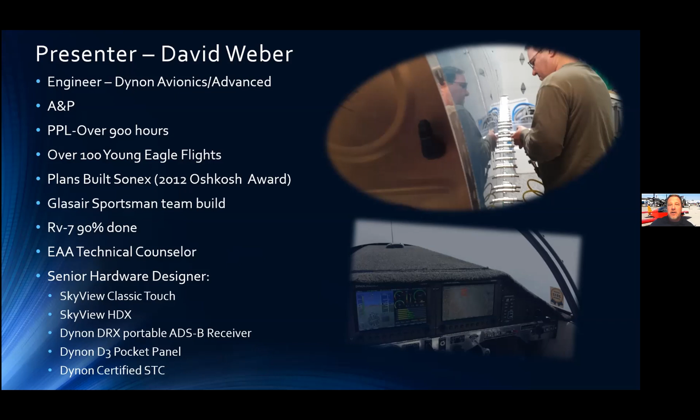I am an EAA technical counselor. I do an inspection on an airplane at least 2 or 3 times a month. I learn a lot doing that, and I hope to educate people that are not quite as involved in aircraft construction as I am. I'm a senior hardware designer for the Skyview Classic Touch and the Skyview HDX. That was probably my biggest project at Dynon. I did all of the industrial design, mechanical design, everything from the bezel to the buttons on that. The Dynon DRX, all the mechanicals on that, the Dynon D3, and I've recently transitioned into the Dynon certified STC side of the company, doing all the design work on the autopilot installations and panel installations for that group.

All right, let's get into this. Planning for success. I'm going to give you an outline of what we're going to talk about today: before you buy, system components, installation fundamentals. We're going to talk about panels, ADAHRS, remote compass, an EMS module, GPS receiver, and then a little thing I call hold my beer and watch this. It's basically some things you should do before you take that first flight.

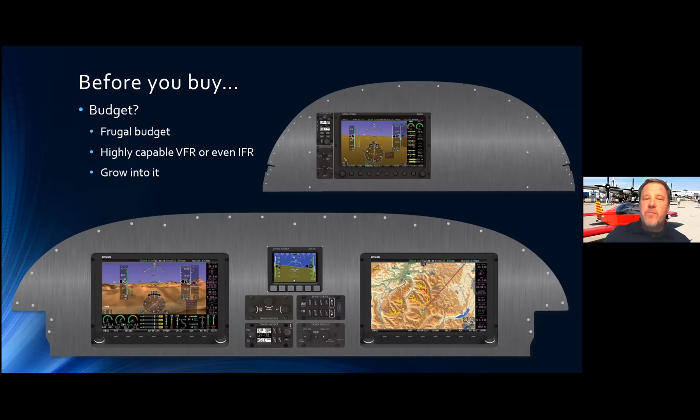You know, you leave that catalog sitting on the coffee table during Christmas time and circle that next component you need and just kind of shove it out there to your wife and let her know what you're looking at. It's worked for me a couple times. You should try it. So we're going to grow into that.

Before you buy, you also want to do some product research and some system planning. Keep in mind, you're not just buying the product, you're also buying a company.

A lot of people say, and my dad was absolutely wonderful at this, he would buy the cheapest thing he could possibly get, but what he didn't realize was that a lot of times that didn't come with things you would get, like technical support. Does that technical support cost you money? There's kind of a history in our industry that a lot of companies will charge you for technical support.

Dynon has never, Dynon will never charge you for technical support. One of the things Dynon is very proud of is that when you call us, we pick up the phone. We have guys that monitor the forum. Mike has answered plenty of questions on weekends and holidays on the forum. So Dynon is very active in providing the technical support you need.

How long has a company been doing business in the market? This is something else. Dynon's market is the experimental aircraft. It's our bread and butter, it's what we started doing years ago. We've never left that, we have no plans to leave that. Everything that we do, experimental is the first thing in the thought process that we go through. The vast majority of our resources are spent towards the experimental market.

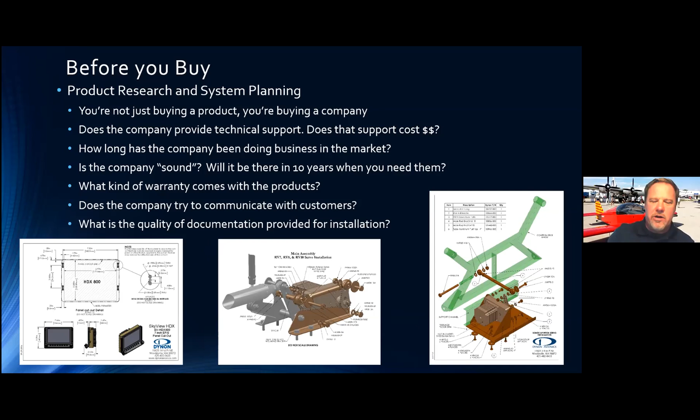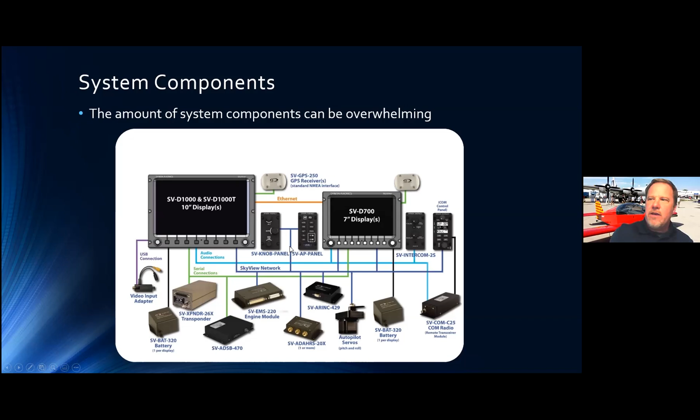And it continues to grow when you add things like fuel flow sensors, engine oil temperature sensors, amp shunts for current flow, pitot, AOA, and pressure sensors along with manifold pressure sensors. The system starts to grow and grow and grow.

But I don't want to scare you away with that, because glass systems can require more components because they do more, but they're also more expandable and flexible. As you allow a system like basically a computer into your cockpit, you notice that it has that flexibility where you can keep it simple or expand it as you grow. And you'll hear me over and over again talk about the expandability of a glass cockpit and the system that goes along with that. If desired, they can be very simple.

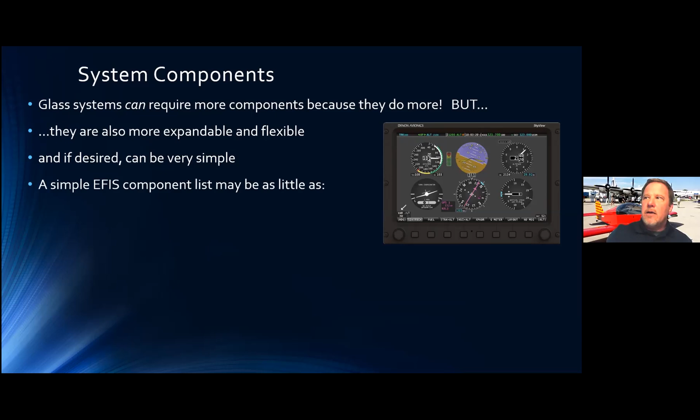And what do I mean by simple? Well, a simple EFIS can be as little as a display panel, an ADAHRS, an OAT sensor, and a GPS receiver. That is all you need for your basic six-pack using a SkyView system. So it can be very simple along those lines, as you can see with this.

I'll add just one quick thing to what David said about the components. Sure. He showed you a kind of a logical interconnect diagram there that showed things that are connected via SkyView network and things that are connected to other systems or via serial connections.

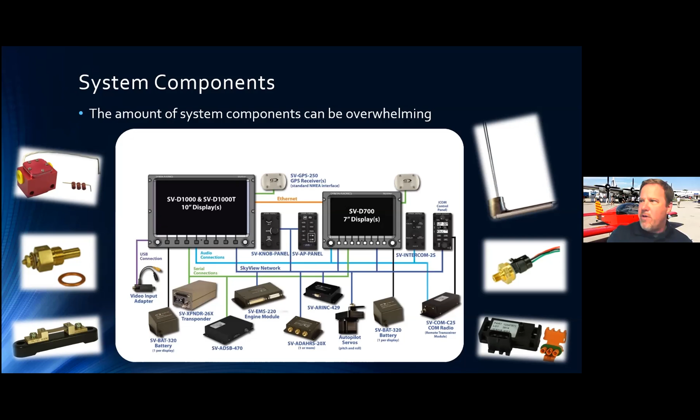We now have harnesses to cover almost all of those interconnects, and things like all of the dark blue, the SkyView network, it's literally just plug and play. And other harnesses have color-coded wires that match the diagrams in our manuals. So we've made it as easy as possible there. Great, yeah, great point, Mike. We've worked really hard at getting the system as simple to install as possible.

So we've got a highly capable EFIS system, and it can be simple, but you can also start adding complexity to that. But we like to call it highly capable, because we've taken that complexity and made it as simple to install as possible. I also want to point out here some of the different components that you can start adding and expand in that system.

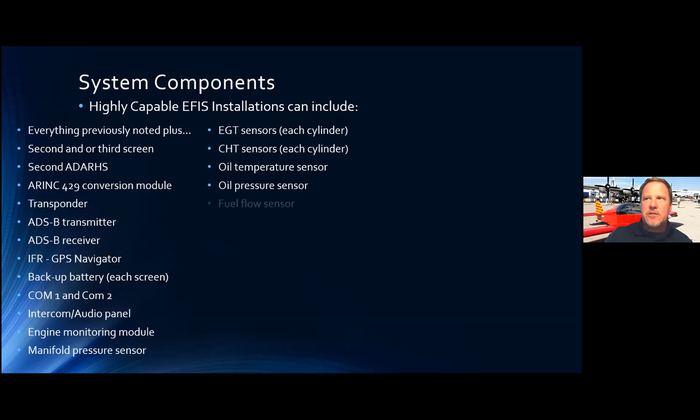Second ADAHRS, transponder, ADS-B transmitter, ADS-B receiver, an IFR GPS navigator, backup batteries for each screen, COM1, COM2, an intercom, engine monitor module, manifold pressure, all these things that keep going on. I don't have a complete list here, and yet you can see how overwhelming all these different components and features that can be added to a glass panel system can be.

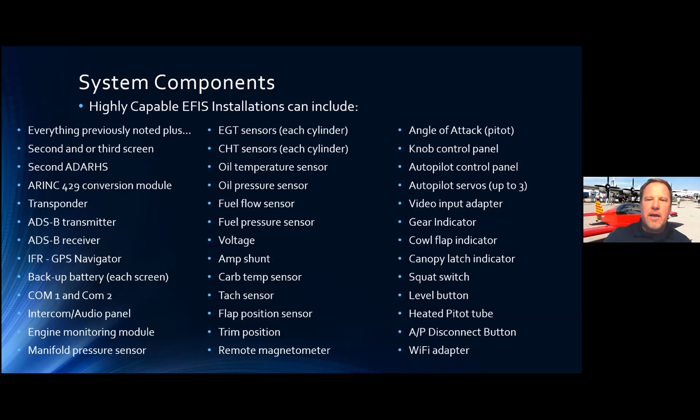And I put this up here to, again, show you the expandability of your system. You can start off basic and just keep expanding as time goes on. Okay, before we move on, any questions so far?

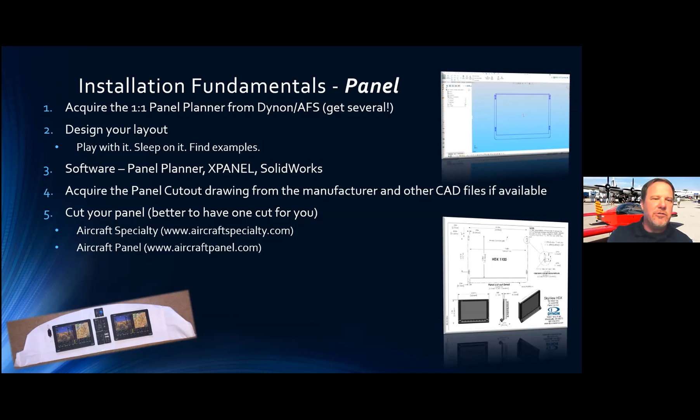Acquire the panel cutout drawing from the manufacturers. Again, I'm highlighting a spec sheet here that we provide, all downloadable off of our website. You can cut your own panel, or better yet, you can have somebody cut it for you. There's a couple companies right here that I point out: Aircraft Specialty that will cut panels, Aircraft Panel that will cut panels, and they are very familiar with our stuff. They know how to cut out our equipment and how to mount the anchor nuts, etc., to get you a great and very successful panel.

Now, of course, there's always the ultimate option here, which is to go to Advanced Panel. Advanced is a sister company of Dynon, and we're very proud of what they're able to do. And I'll give you an example here in a second of what they're capable of doing. But this is one of those things where you are very scared, for lack of a better word, of wiring your own panel.

I always joke with the president of the company, Robert. I said the scariest part for a builder isn't the first flight. The scariest part for a builder is turning on the panel for the first time and praying you don't see that magic smoke come out. Magic smoke is very expensive, and I'm sure that there's a few people in the crowd that have experienced that.

Given that inability, go ahead and talk to Advanced Flight. They'll give you a quote for free. They're very friendly, and they've done this time and time again. They know what they're doing.

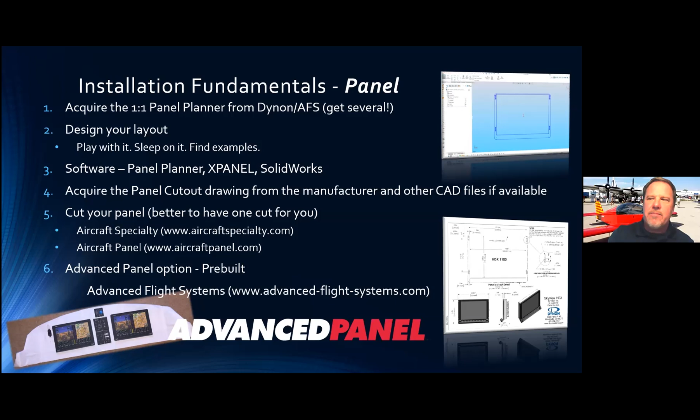And then you get yourself a nice, beautiful panel sent to you like this from Advanced Flight. Absolutely gorgeous layout, very well laid out and very well thought out.

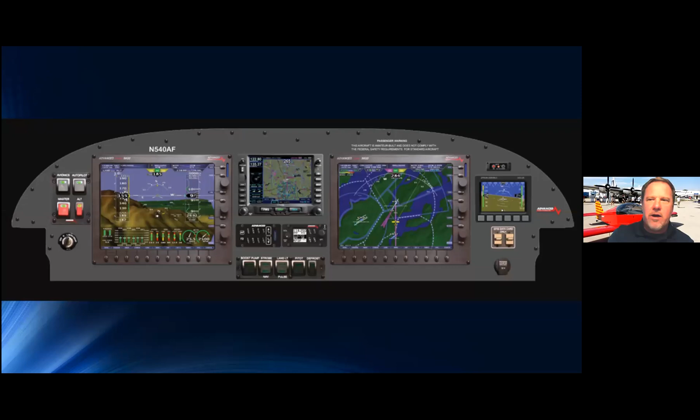Great. One of the things I try and educate people on is panel layout. And I see it time and time again where not a lot of thought goes into where the components should be placed, and you kind of get this busy panel. The FAA has gone out and created an advisory circular, 23.1311-1C. And basically what this does is it goes through in detail, think government document, how to lay out a panel. They talk about field of view for the pilot, and it's all based off of an average panel distance to the pilot's eye. They deem that to be around 30 inches.

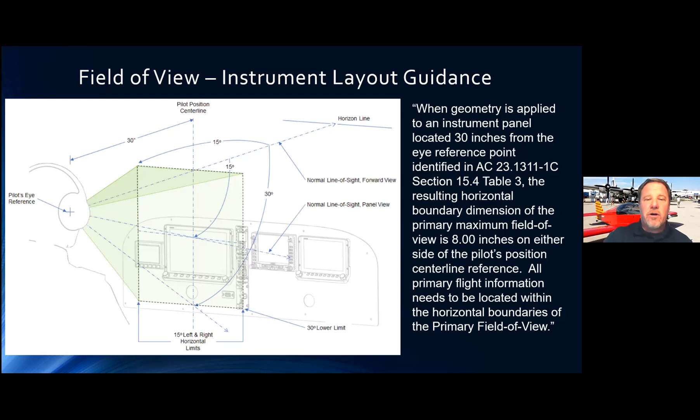And at 30 inches, you want this 15 degrees of sweep from the left to the right, 30 degrees from the top to the bottom. And it really translates into about 8 inches either side of the direct center line of the field of view. That is the optimal area. For primary equipment, primary instruments, you should not have to turn your head and still have everything in viewable sight. This isn't a requirement for experimental, but it is a requirement for certified aircraft.

Hey, David, one question we get in the sales office pretty often, more so for the certified side of the house, is placement requirements for the D10A. You want to talk on that for just a second? Sure, the D10A is considered a backup instrument, and again, it's not required in experimental. Originally, the D10A was laid out over on this side panel, and that was not acceptable to the FAA, so we came up with this location.

The D10A has a very small screen compared to the other screens that we have, so we try and keep that as close to the pilot as possible. It is a backup, so not as critical, but you definitely want to have that viewable by the pilot without having to do any side-to-side movement of the pilot in the cockpit. A slight turn of the head is not bad, but again, eye movement is what the FAA finds critical in that.

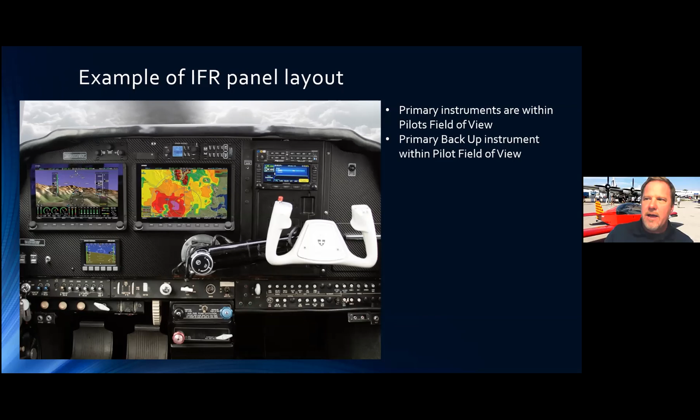You have a harness that, even though it might be 2 inches long for the housing, the harness itself comes out and has to make a radius turn. So it's very critical that you take that into consideration where you're laying components out, even behind the panel on your sub panel.

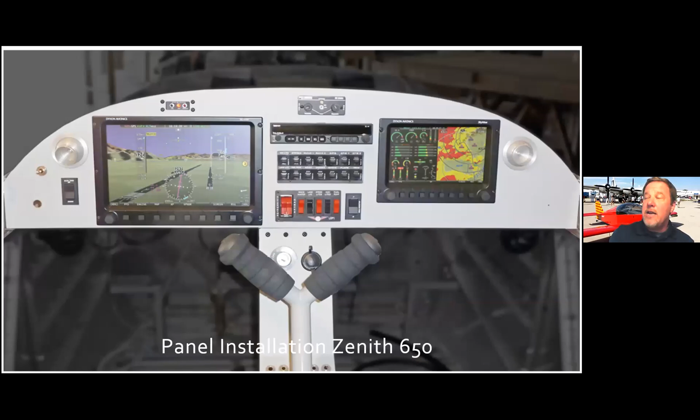Here's an example of a Sonex panel. How do I know that? Well, this was my Sonex that I built. People say that you can't get 2 screens in a Sonex panel. I did it, 2 7-inch screens, not the 10-inch. Don't ever tell anybody I said you could put 2 10-inch screens in a Sonex panel.

Again, everything in the panel is thought out as far as accessibility to the pilot. Everything that is most critical to the pilot, like the radio, is very accessible to the pilot.

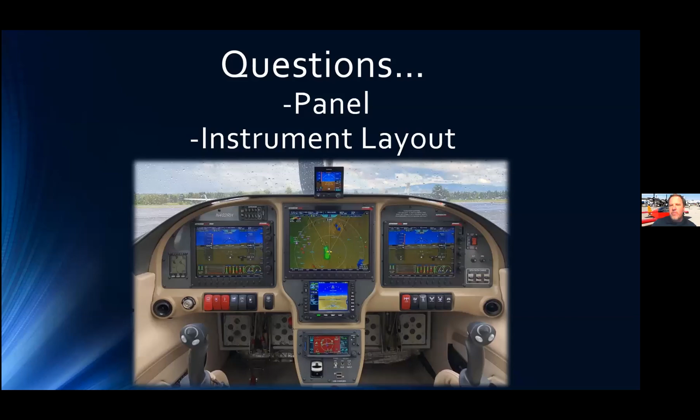Good question. And the answer to that is when the yoke is in flight, it is pulled back significantly from that location, which allows very good viewability of that D10A. I'll back up here a little bit to kind of show you that. If you imagine this yoke swung over here and pulled back about 10 inches, the pilot eye is up well above this, and it gives you a view of the screen on the D10A.

We had to move this up as high as we could without the kicked out bezel of the HDX obstructing it. But you can move it up as high as you can to get that viewability. You also don't want to obstruct the switches down below on the lower bezel. Did I answer your question?

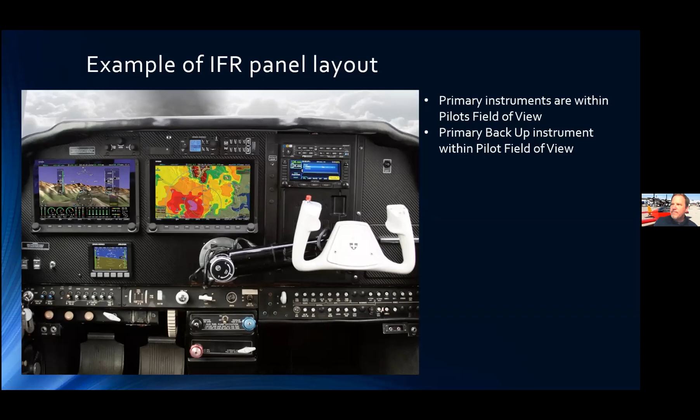Yes, thank you. And of course, in a certified installation, it's always a good idea to make sure you're complying with things like advisory circulars, because although that's not law, it's basically policy and represents the FAA's opinion collectively on things. And as David was saying, the main thing you're trying to do is you want to have visibility.

As a pilot, you don't want to have it way over on the right. You don't want to be craning your neck when, let's say, everything else has failed and you're on one backup instrument, and it's still super capable, but you want to have that thing as near front and center as possible.

One resource we've put together too is our certified panel photo gallery, where you can see the D10A in a number of different locations, sometimes below, sometimes to the left, sometimes to the right, sometimes up high. There are different schools of thought on what the ideal placement is, but you have options.

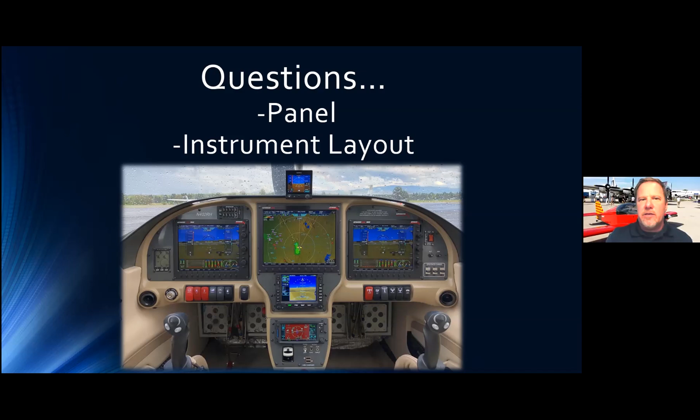So now we're going to start getting into some of the meat of the stuff. We've talked about some of the pretty things, but now we're going to start talking about actual equipment. And the first thing we're going to talk about is what I call the most critical piece of equipment in our avionics system, which is the ADAHRS. This is really the brains of the entire system. If you get this wrong, you're going to be very sorry. You're going to have a system that performs poorly. So we've tried to make that as simple and as flexible to install as possible, and I'll get into that during this part of the presentation.

Some of the things you want to be very aware of when you're doing this installation is you want to make sure that you install it on a rigid surface. Vibration in this is very undesirable. We have an algorithm that can detect what we have determined to be known vibrations of a typical aircraft, and we filter those out. But what I've actually seen people do is put this piece of equipment on top of rubber isolators, and they see poor performance. The reason is because we're expecting certain vibration, but you want it to be rigid. You don't want it on top of something rubberized. For hardware, do not put rubber washers on it. Make sure it's rigid and is not swinging around in large isolation.

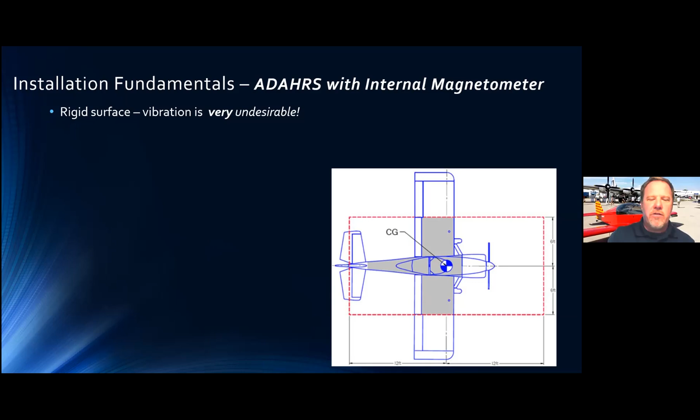Think of a waveform, and the larger the amplitude, the harder it is for us to detect what your aircraft is doing. Small amplitude, which is what you typically see in an airplane, we can filter out and move on. As close to the center of gravity as practical, we give you this nice little chart that shows the box you've got, which is 12 feet longitudinally and 6 feet laterally. Anything outside of that box, you're going to start seeing significant performance degradation in your system.

No closer than 24 inches to ferrous metal. Now, this does not apply if you're using a remote magnetometer, and I'll get into the remote magnetometer mounting in just a bit. There's two types of ferrous materials that we talk about in our system installation: static and dynamic. Static ferrous materials can somewhat be tolerated. What I mean by that is a bar, a piece of steel, a ferrous material that does not move.

Something like a bolt, that kind of thing can be calibrated out when you do your magnetic compass calibration. But if it's moving, it's very difficult. Imagine a steel push rod or a seatbelt buckle.

I had a fellow Sonex builder who put his ADAHRS right behind the baggage compartment, and it was working fine. Then one day he went flying and couldn't figure out why he was having such bad performance on his autopilot. When I talked to him, he had put his laptop in his baggage compartment, about 4 inches away from his ADAHRS underneath the baggage compartment. That laptop completely messed up the magnetic compass and affected the performance of his autopilot. So be aware of that—it's not only static ferrous metals, it's dynamic interference too.

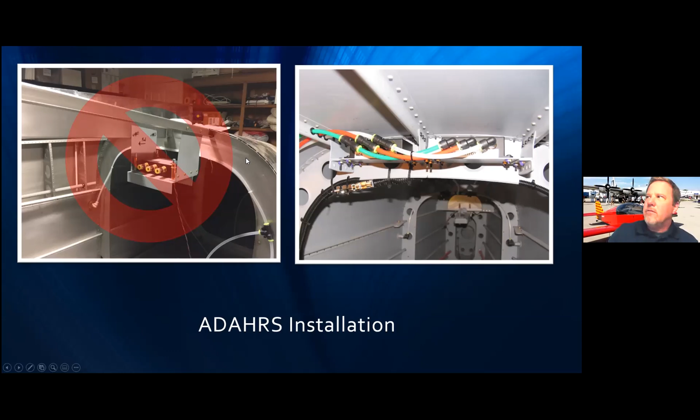What we want to see in an ADAHRS installation is something much more along the lines of what we have here, where we've got nice thick pieces of aluminum. We've got 3 of them coming down, nice and rigid. He's kept the arm of this aluminum piece nice and short so we don't get a lot of vibration back and forth. This is a dual ADAHRS installation, and it's a very nicely done installation—that's what we want to see.

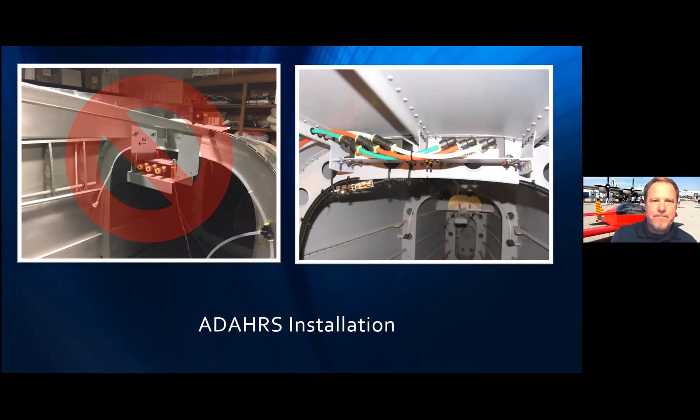Okay, remote compass. Dynon came out with a remote compass several years ago to really take care of you tube-and-fabric kind of guys that were seeing problems. It's the same enclosure as we use for the ADAHRS, but we put a pigtail on it—a pigtail being a length of wire. We do that to keep the connector away from the module.

So as with your ADAHRS mount, keep away from ferrous materials—again, if it moves, stay even further away from it. If it's static, we can somewhat calibrate that out, but still stay away if you can. It doesn't have a specific location, so you don't have to follow within that box like the ADAHRS does. We see these installed way out in wingtips; there are no accelerometers in it, so it doesn't matter if one wing moves at a different speed than the other. It doesn't matter what location you put it in on the aircraft, but again, stay away from ferrous materials.

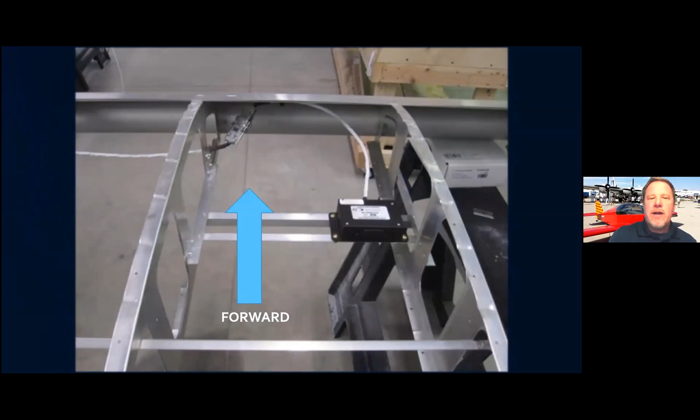There is an orientation requirement though—typically the pigtail has got to be facing the direction of flight, and the pigtail should be at its extended length. That, as I touched on, is to get the connector away from the magnetometer inside the box. Here's a great example of a nice installation: the builder has put it on a nice rigid mount, and he's got the full extension of that pigtail going out, keeping that connector away from the box.

Okay, any questions on the ADAHRS or magnetometer installation? I'll add just one thing on electronic devices and the magnetic sensors, whether you're using the ADAHRS or the magnetometer.

Current carrying wires and devices generate electromagnetic fields. The more the power, the more the current, the higher that field. So for things like wires running to our GPS receiver antenna, they're very low current, very low power, and those wires aren't going to dramatically affect the magnetic sensing performance. Now, on the other hand, the power carrying cables going to your autopilot servos...

The servos themselves carry amps, a few amps to each of those servos, and the wires going to those are also dynamic—sometimes they're on, sometimes they're off. So that would be an example of a thing to stay feet away from. You have almost up to 5 amps going through those wires, so exactly, stay from those kind of wires.

Any other questions on the topics we just covered? Otherwise, I don't see any hands, so I think we're good to move on.

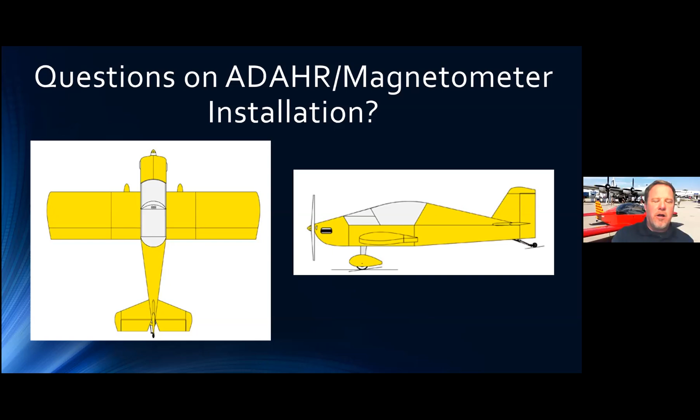Next thing we're going to talk about is the EMS module, the engine monitoring module.

Again, severe vibration does things to electronics that aren't good. So just try and keep things away from high vibration areas. Make it a nice rigid mount. Don't put it on a piece of sheet metal that's going to bounce back and forth. I'll give you some examples here towards the end of this section.

Avoid excessive heat, high temperatures. The reason for that is multiple things, but high heat can cause electronic components to drift, and it can give you inaccurate readings. You have something very hot, you've got sensors inside that box, they're going to drift slightly and give you different readings. It also can reduce the lifespan of electronic components.

I have seen people mount EMS modules on the hot side of the firewall. Not recommended. They tell me, oh, it works just fine. I understand it works, but you're reducing the lifespan of that piece of equipment. Having an EMS module fail while you're in flight over the Rockies is not something that you want to encounter. So do yourself a favor, keep it on the cold side, keep the vibration low to it.

And again, with almost every bit of electronics, keep it away from EMI—spark plug wires, wires with high current, magnetos. The further away from high energy EMI, the better off you're going to be.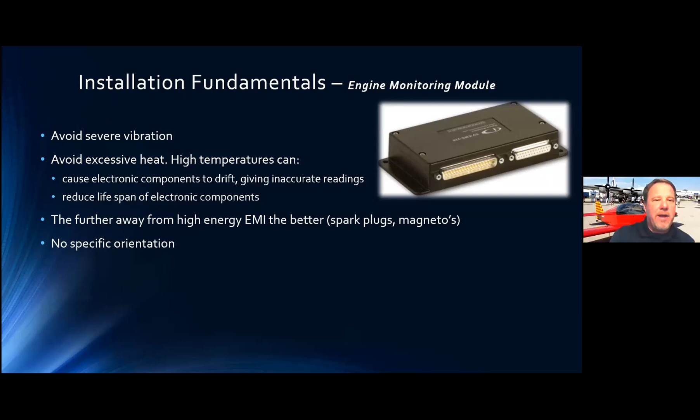This has no specific orientation. You can mount it underneath a seat, mount it underneath the panel, right side up, upside down, whatever you want to do. No specific orientation whatsoever.

I touch on this because we get this quite a bit when it comes to the thermocouples, and that is, can I cut the wire? Yes, you can cut the wire, but I suggest if you do cut the wire, make sure you're cutting the right end of the wire. I have had people cut the wrong end of the wire, so make sure you're not cutting the thermocouple end off. But I also suggest that you keep the wire lengths as reasonably as possible the same length.

The reason for that is possible future troubleshooting. Sometime in the future, you might have a cold cylinder and want to swap a thermocouple around to see if it's the thermocouple or the cylinder. This gives you that ability without having to add a completely different thermocouple. So if you can keep those lengths the same, the better off you're going to be.

If you do need to extend the length of that wire, I strongly suggest you contact Dynon. We have worked with people in the past to provide them either extra length in that harness or some sort of extension. We do ask that if you have a junction on that wire, you well insulate it and keep it away from any sort of heat source. You will get drift if that happens.

As I said, I can't preach this enough: do not install it on the hot side of the firewall. People tell me all the time, 'I did it and it works great.' Don't do it. You're going to regret it at the worst time in your flight.

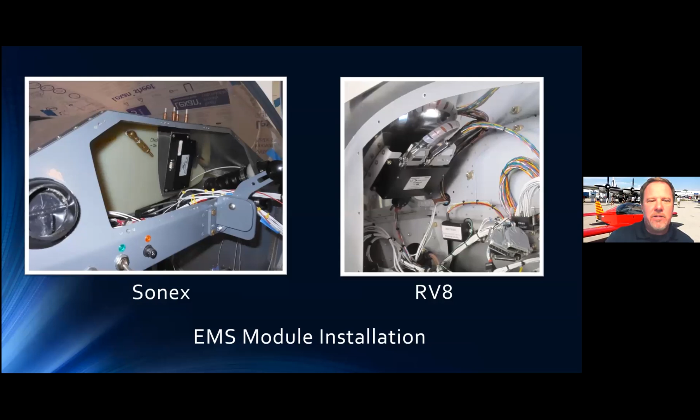Here's a couple other examples. I believe this is a Sonex where the installer has put it right here — again, a nice, easy path through the firewall out into the engine bay area. No fire sleeve here, but that's just my tech counselor talking.

Over here on this side, we've got a module mounted in an RV8 right next to the ACM module. Not a bad location, but he now has to run wires through this bulkhead and another bulkhead back here to get to the firewall. I would strongly suggest moving this forward and getting it closer to the engine firewall. Much easier to run this cable to the ACM module than to run all this stuff to the back firewall or the forward firewall. Not bad, just not a great installation. Keep that in mind when you're doing yours.

Okay, any questions on the EMS module?

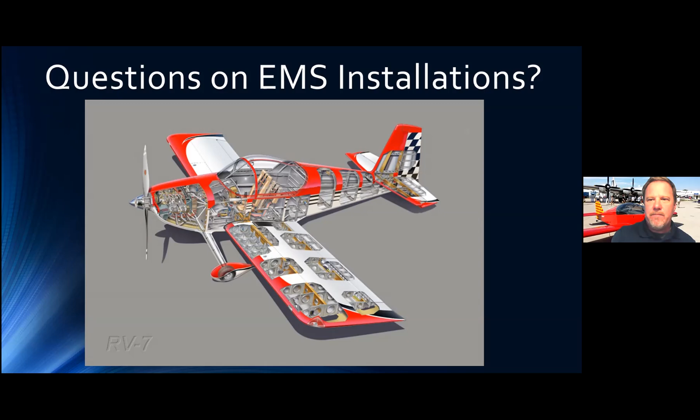We're hitting pretty good on time so far, Mike, so I'm going to keep going forward unless we hear something else. Kyle, did you get any questions? We're good, I don't — so far everybody we've been able to handle in chat. I think Scott got his question answered as well, so keep going, and we'll let you know if something comes up.

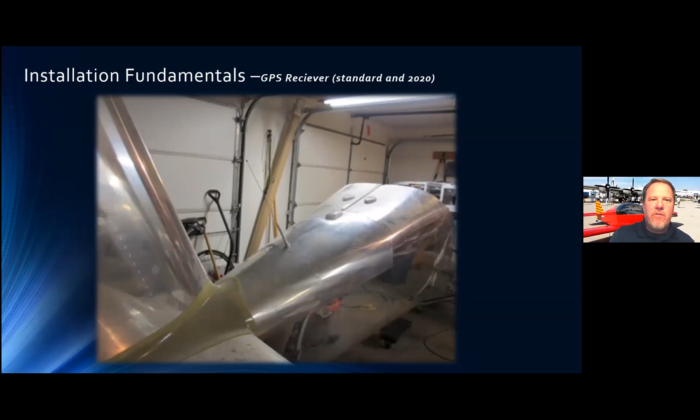Okay, another installation fundamental: the GPS receiver. This is probably the second most controversial installation we get, the GPS module receiver. I have horror stories of people actually putting this on the bottom of the aircraft. Please do not put it on the bottom of the aircraft.

Again, a rigid surface — in fact, I would recommend a doubler on this, even though it's a small piece of equipment. Definitely put a doubler on the backside, because most people mount it like you see here in the picture on the turtle deck on top of the skin. You definitely want to double up that skin at that location.

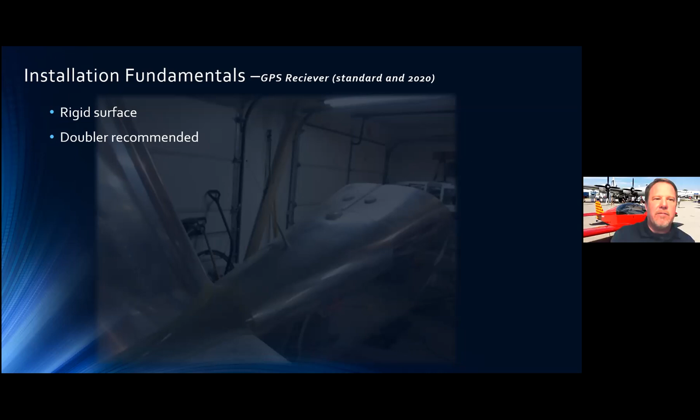36 inches from any transmitting antenna — not such a big deal with an ELT antenna though. Why? Well, if your ELT antenna is transmitting, you've got other problems; you don't really need to know your GPS position. So kind of a gimme on that one. If you want to put it fairly close to your ELT antenna, you could probably get away with that.

Orientation: skyward. Again, I've had absolute horror stories where people tell me they mounted it on the bottom side. I actually had an amphibian aircraft that I went out and did an inspection on, and he had put it on the bottom side of the wing.

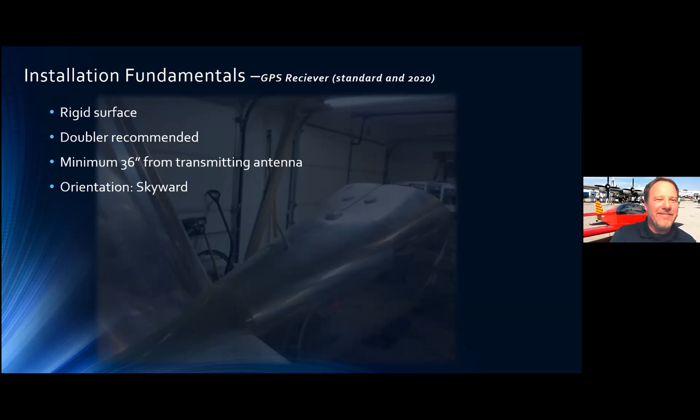He thought it was all right because it was above his head, but not where you want to see it. It's got to be pointing skyward. Mike, a question that you've been posed, if you're going to touch on this anyway, but that comes up often, is where are places people can hide it? What kind of cowl materials can they put it under, or should they avoid?

Yeah, so any kind of metal, even carbon, is not a good place to put over the top of this. You can get away with it with fiberglass, with the exception that most people paint fiberglass, and if you paint it with a metallic-based type of paint, then you're going to really degrade the performance of that GPS receiver. So the best thing, it's designed to be outside. You can put it outside.

If you do have a glass or plastic airplane, as they call them, you could probably get away with it underneath the fiberglass. Again, I would just caution you on what kind of paint you put over the top of it. We do say in our installation manual that you should not paint this at all. We have a very robust paint on top of this module that comes from the factory. It is not a metallic paint, so we know that it is not affecting the performance of that GPS receiver.

You want a 360-degree unobstructed view to the horizon with this. I'm going to give you some examples here in a minute of some bad things that I see people do with installation. But just imagine yourself sitting on top of that GPS receiver; you should be able to turn yourself around 360 degrees and see the horizon without any significant obstruction. Now, obviously, a vertical stab is an obstruction, but it's such a small obstruction in that vertical position, you're not going to see any degradation of performance with that. Not something to be concerned about.

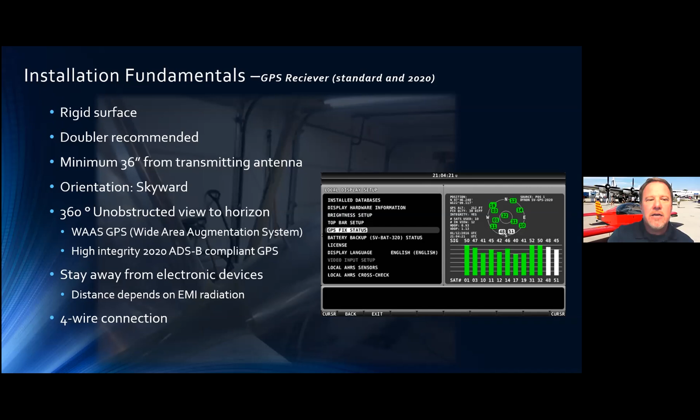The nice thing about our receiver is it's a simple 4-wire connection. It's not a BNC connector like you see on a lot of other receivers. I say receiver, what I really should say is antennas, because they are nothing but an antenna. Ours is, again, a complete system within itself. Therefore, it's a 4-wire connection.

One of the things that you will end up doing with the 2020 ADS-B test is what they call the PAPR test. You go up and fly a certain pattern, a figure 8, and you'll get a report back from the FAA. And even though you get a report back that says you pass with your GPS, with your ADS-B compliant system, the one thing I will tell you is that an installation that might pass the PAPR might not pass the "I'm flying down a valley trying to scud run" test, and all of a sudden I lose my GPS performance. So keep that in mind when you're doing an installation.

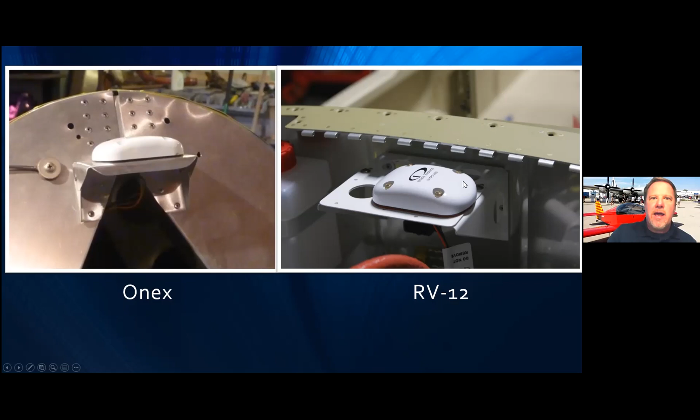We also see this common on RV-12 installations. Why? Well, Vans actually had this as an installation. They have since moved things around a bit, and because the fiberglass cowling goes right over the top of this, you see this kind of installation all the time. I highly recommend against it; this is not a good installation. Do something different. Is it really worth losing your GPS location so that you don't have an antenna sticking on the outside of your airplane? Please don't do this installation.

I beg of you. This is the kind of installation where you're flying down a valley, you're scud running, and all of a sudden you've got mountains obscuring your satellite reception on both sides. You've got your firewall obscuring any sort of reception behind you. You're going to lose satellite reception. Just don't do it. Think about that.

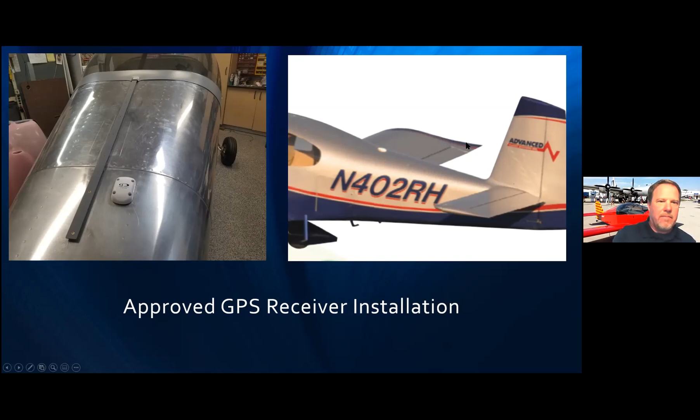Here's some good installations. Back of a turtle deck. In this location, the canopy will slide back and go right over the top of that. No problem. So it's a good installation. And you see here on an RV-10, same kind of thing, where an installation on the back of that aircraft is a great installation. In flight, you're going to get plenty of satellite reception. Okay, any questions on that GPS installation? Anything to add to that, Mike?

I think you covered that pretty well. The only thing I would add on the SV GPS 2020 in particular, because it is used for performance credit with the FAA and ADS-B out, you really don't want to paint that. You really want to leave that as is. David, there were a couple questions in the chat about proximity to other GPS receivers and ground planes. Are there any big topic items you want to share on that?

Yeah, again, I would say keep away from other GPS receivers. I've seen with ours, I would say 6 inches away is a good distance. You just don't want them butted right up next to each other. A ground plane is not completely required with our installation. As a matter of fact, we have an insulator on the bottom of ours to keep you away from that. So no ground plane is required in our installation.

One thing that's different with our GPS antenna, even though it looks like an antenna, it actually has the receiver built in. With most other products, the antenna is just the antenna and it runs coax back to the receiver, which is often in the device, but ours is a self-contained thing, just like the GPS in your phone or in a fitness watch. So it really is a self-contained thing.

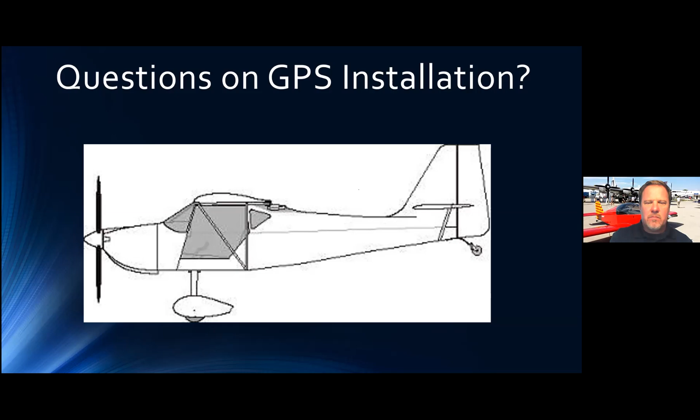All right, moving on. I kind of blow through this stuff. We're a little bit behind on time, but this is the easy stuff.

Transponder: avoid severe vibration, just like almost everything else, and excessive heat. It does require RG400 coax cable routing. When you're routing that coax cable, try and avoid routing it with other wires, especially things that are high emitters. Keep the radius of that bend, this is an AC 43.13 requirement, no less than 10 times the diameter of that coax, okay?

Another thing is, even when you're routing that wire, don't bend or kink that wire. The reasoning for that is most of those RG400s have an internal mesh in there for the shielding provided in the cable itself. And when you kink it, that mesh opens up and it cannot go back to the same as it was before. And you're going to see a degradation in performance because of that. So do not kink. Do not make excessive bends when you're routing that wire. Keep those coax cable runs to a minimum.

We have some information in our installation manual that goes more in detail. But if you can mount the transponder module itself as close to the antenna as you can, you're going to be better off. It does have a TNC connector at the module. And typically most of the transponder antennas have got a BNC.

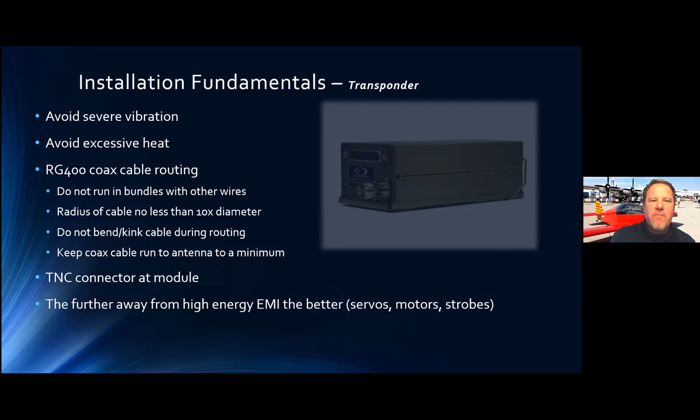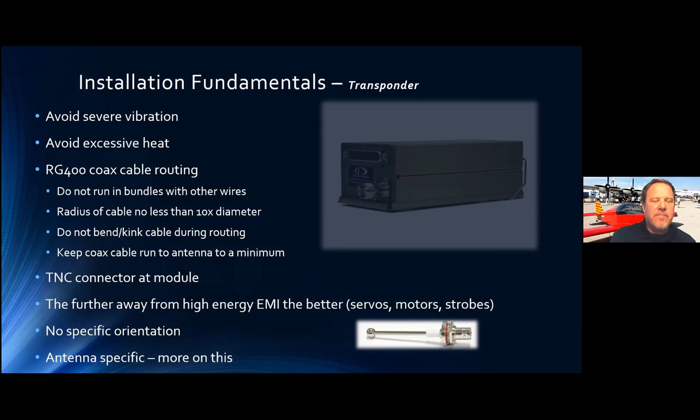The further away from high energy EMI, the better. No servos, no motors, no strobes. No specific orientation. You can mount this anywhere in any orientation you want. It is antenna specific. There is a specific antenna required for transponders, and we do sell one, and it's a fairly simple installation. Nothing much to worry about installing it.

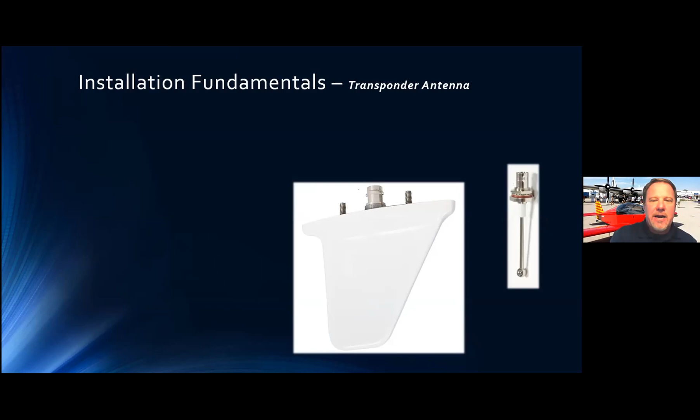Transponder antennas, a couple examples of what transponder antennas look like. Pretty simple installation, but it's got a BNC connector on it. Keep it away from other high energy emitters, servos, motors, strobes. It's a coax cable run. Keep that coax cable run to a minimum, as I mentioned before.

It doesn't have a specific orientation, meaning rotationally, but it does have to be located on the bottom of the aircraft. And if you do put that on the skin, again, a doubler. Anytime you mount an antenna to nothing but bare skin, you want a doubler on there. Yes, it's short. It doesn't have a lot of drag on it, but today it looks great. 10 years from now, without a doubler on there, you're asking for trouble.

There is antenna separation. We give you all this information in our installation manual, but I'll kind of quickly go over it here. 3 feet from a comm antenna, 6 feet from any sort of DME equipment transmitting antenna. Okay, anything that's an emitter, you want to keep away from this antenna. This is a high emitter itself. This is probably one of the most high emitters on your aircraft as far as constant emitting next to the comm.

If you would read somewhere like, well, it needs to be, you know, ideally a radius of whatever. So you think, well, radius, that means a circle. So I'm going to make a circle. That's actually not going to make yourself a great ground plane. I don't know all the reasons. I'm not an electrical engineer, but one of our electrical engineers gave me the whole background on it. Also, RF is voodoo magic, so people have just discovered things that work and don't work.

We've been very successful with this kind of a ground plane. Yeah, square works good. One last question: do you need the serial connection from a Garmin GTN 650?

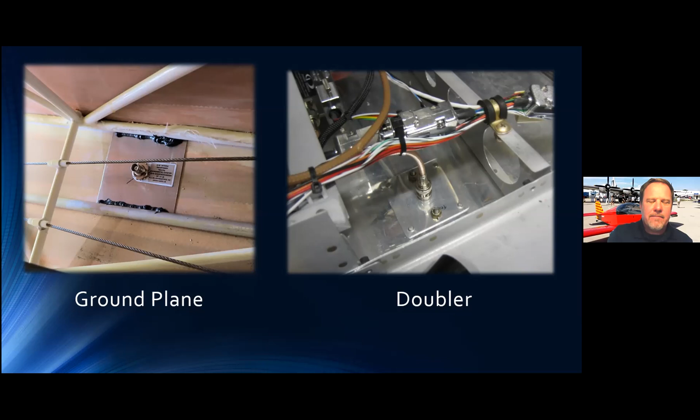The IFR navigators are fundamentally ARINC devices, but we do use the serial into the ARINC module, not into SkyView directly, to complete the 3D GPS position fix. That includes things like altitude, or GPS altitude, and a couple other things that don't come over the ARINC. So you end up using a serial out from your navigator into our ARINC in.

I don't think there's any hands raised, so. Okay. Moving on. Yep. Moving on.

Okay. So now we've kind of gone over a basic installation of a system, and what I'm going to ask you to do in this section, I jokingly call it "hold my beer and watch this." Really, what you need to do before you fly. It's a collection of things that through years we've experienced, common mistakes installers make before they have that first flight. You're nervous enough on your first flight.

I've done 2 of them now, and I can tell you from experience, as much planning as you do, you're going to find yourself wishing that you had done more. There's things that you might forget. So keep in mind that there's some basic things that you can do with your system before that first flight. You'll have plenty of other things to worry about. These are things that you can do before that first flight so that you know you're not going to have any issues in your first flight with your system.

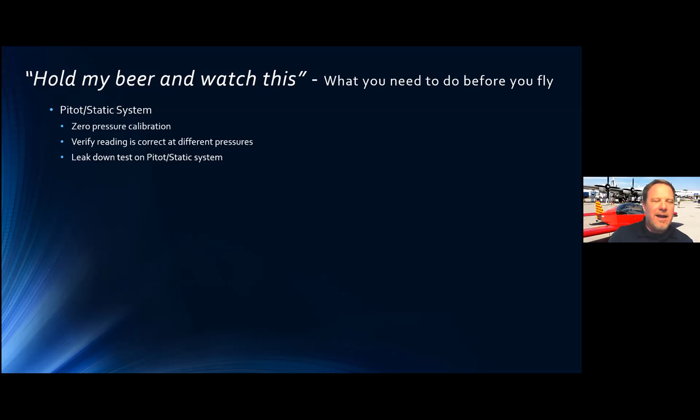And there's 2 ports on the bottom of that pitot tube that are drain ports. Make sure you go over the top of those 2 when you're doing this test. That can also help you with a little bit of a leak down test on your pitot-static system. You leave that balloon on there for an hour or so and see how much it deflated. The FAA has an AC, an advisory circular, on what those are. I don't need to go into that kind of detail with this presentation.

GPS signal is sufficient. I kind of touched on this already. Again, you don't want to be taking off on your first flight and notice that you're not getting a GPS signal. Push it outside, get away from buildings, make sure that you're receiving all the signals that you're supposed to be receiving with that satellite. Make sure that on your system, you can select the different GPSs if you have more than one GPS signal coming into your system.

I had a situation where somebody thought they were getting GPS signal from ours. They were getting it from another system, and the synthetic vision was very jerky, and it bothered them during their first flight. Come to find out that they were actually hooked up to another GPS receiver that didn't run at the speed that ours does, and that's why they were getting that jerky hesitation on their synthetic vision. So make sure that you've got that GPS signal, make sure that you're receiving the right one.

We get calls where people say, hey, I'm on the ground and it's jerking back and forth and it doesn't give me the direction. Well, GPS doesn't know what your direction is unless you're moving.

Compass calibration: do this in a certified location if possible. If your airport doesn't have one, go someplace away from buildings. We actually had somebody that could not get a good compass calibration. Why? There was rebar in the runway messing up the calibration. So keep that in mind. Make sure you're going someplace where there's not a lot of magnetic deviation. You can use a wet compass to verify that before you do it.

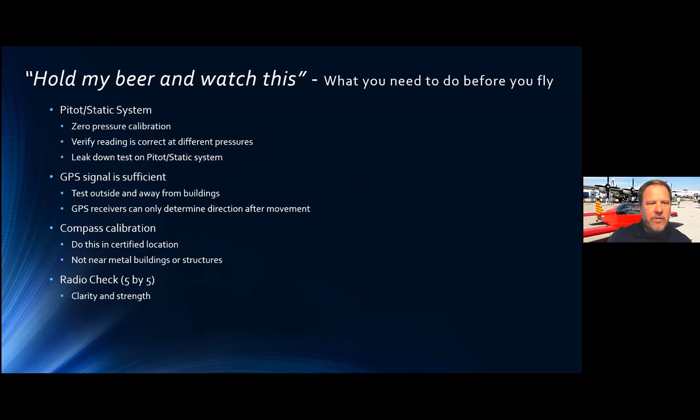Transponder - this is always a contentious thing where people say, hey, do I have to get the certification on your transponder before my first flight? I've asked the FAA and I've gotten different answers every time - everything from you're the manufacturer, you can certify it, to not required because it's a first installation, to yes, you have to do it. If you don't have the ability to do it at your airport, I suggest that you arrange to do that at an airport that has that. I doubt you're going to see a ticket show up in the mail because you haven't done it. Or best of all, just avoid any airspace that requires that transponder to be working until you can get that certification done. What I'm basically trying to tell you is don't sweat it too much, but it's a good thing to do before your first flight so that you don't have to worry about it during that first flight. Again, reduce that workload on your first flight, even during your testing.

EGT and CHT sensors - are they correctly located? We see this a lot where somebody has accidentally swapped cylinder 1 and 2. They go out, do a run up, and cylinder 2 shows hot, and they can't figure out why it's running hot. Well, because they accidentally swapped the EGT or CHT sensor. There's a simple trick you can use to make sure your sensors are correctly connected to your system. Get out a hair dryer or a heat gun, blow on that sensor, see what rises on the screen. Go on cylinder 1 - if cylinder 1 shows a rise on your screen, you're good to go.

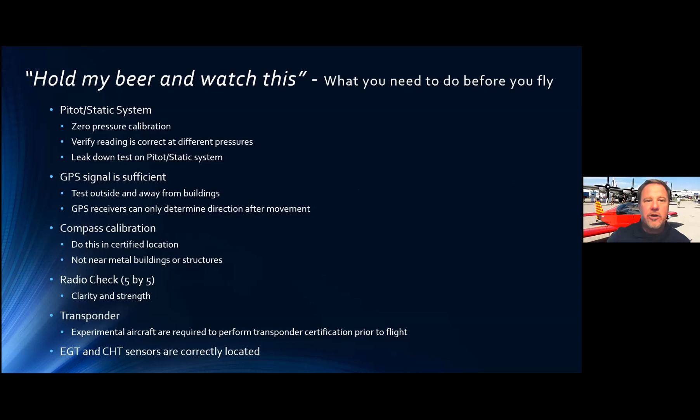Get an EAA membership if you don't already have it. My gosh, you're flying experimental—get an EAA membership. It gets you SolidWorks, it gets you access to a tech counselor, guys like me that can come over and answer questions before you do that first flight, before you close up that wing, before you turn on the power to the panel and see the magic smoke come out.

Nut plates, get a variety of them. On all of our technical data sheets, we tell you the nut plate that you need and the quantity that you need. If you get that data sheet downloaded, you can find out how many you need and what you need. As a matter of fact, I even give you the hole size you have to drill for that nut plate or anchor nut, whatever you want to call it.

Installation manuals—download all of those from our website. Any installation manual that we have, or any of our experimental stuff, can be downloaded for free from the Dynon website. Go there, download them. We update them quite often, so go ahead and check up on that often. Make sure you do that before and after you do an installation, and definitely before you do a first flight. Go on our website and make sure everything is up to date. That also includes software updates—make sure you've updated that software before you do that first flight.